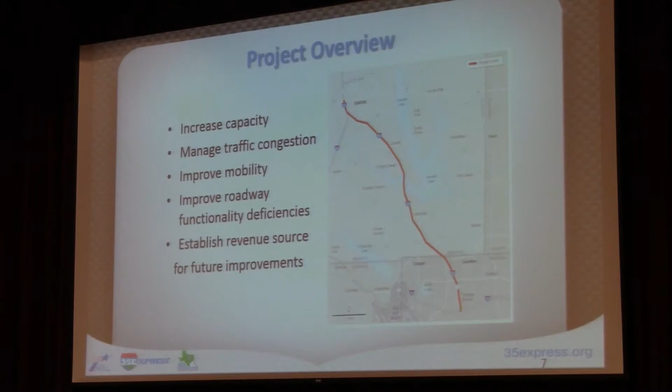What a design-build project does is it cuts the time in half that a normal project would take to build. A project like this may take 8 years, may take 10 years, but we're going to get it done in about 3.5 to 4 years. So it allows our teams to be flexible and to be fluid and to move things along a little bit quicker. As many of you know, we need lots more capacity. I think I heard a stat that said we get 1,000 new folks into Texas every day. A lot of those people are coming to the North Texas region, so we know that we need more capacity, especially in this area. So this project will increase capacity, manage congestion, and improve mobility in the area.

We run through 8 different cities, 2 counties. We work with 4 different transportation agencies, 2 federal government agencies, all working together to make sure that this project runs smoothly, to make sure communication runs smoothly, and to make sure that we're coordinating. There's lots of construction going on in the area, so we have to make sure that we're talking to one another to make sure that we are not impacting every east-west or north-south connection.

To give you a little bit of an overview of this project, we run about 30 miles, and that's going to be between 380 and Denton, all the way down to 635 in Dallas. We'll be building new general purpose lanes, frontage road lanes, and a managed lane system. If we were to do everything that needed to be done to I-35 today, it would cost us $4.8 billion. We only have $1.4 billion identified, so we are doing the project in phases. Everything that I talk to you tonight will be about phase 1 of the project. That is what AGL Constructors is contracted to do by the Texas Department of Transportation. We began construction in late October of last year, and we expect to finish up by mid-2017.

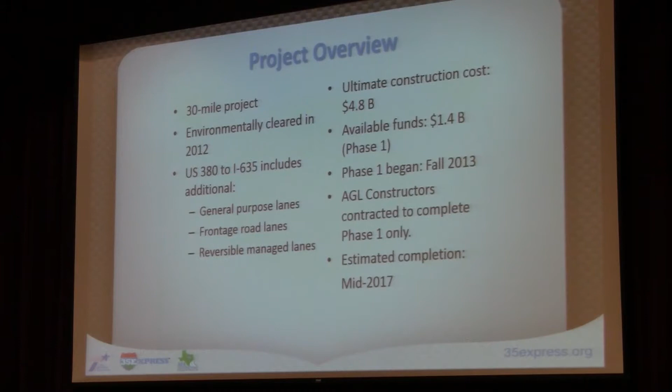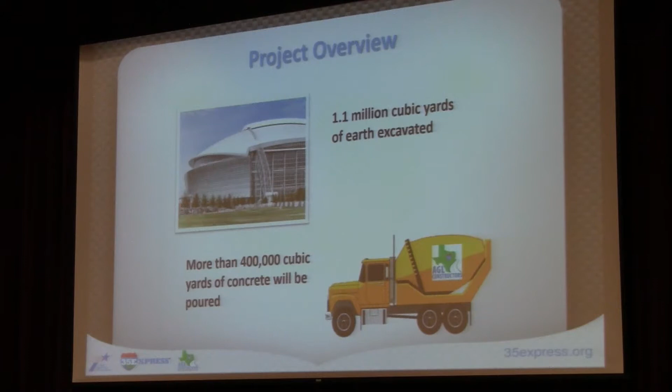To give you some numbers, we expect to create about 900 different jobs at the peak of this project. We will be excavating 1.1 million cubic yards of earth. That's about half the size of the AT&T Stadium, pouring about 400,000 cubic yards of concrete, using about 79.4 million pounds of steel. That's about the same as 8,000 elephants. The elephant weighs about 9,000 pounds on the low end. And then we'll be placing over 650 bridge columns and 2,570 beams.

A new unique part of this project is the managed lane system. TxDOT recently opened the TEXpress lanes on the LBJ project, and so we will have a similar system on the 35Express project. Managed lanes are a congestion management tool with variable pricing. Our lanes will be reversible. They will go southbound in the morning and northbound in the afternoon. The lanes will be separated by barriers and have 11 access points on the north and the southbound sides. You can be a single occupant vehicle or a high occupancy vehicle to use these lanes. You can have one person, or you can have 2 people, or you can have 10 people.

This particular part of the project is called the middle segment. We have divided this project up into 3 segments to handle the public outreach a little bit better. This particular section runs from FM 2181 Turbeville Road all the way to President George Bush Turnpike. So we cover the cities of Lewisville, Highland Village, Lake Dallas, Hickory Creek, excuse me.

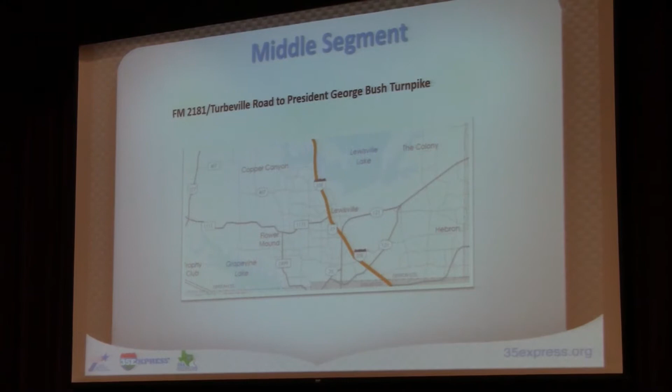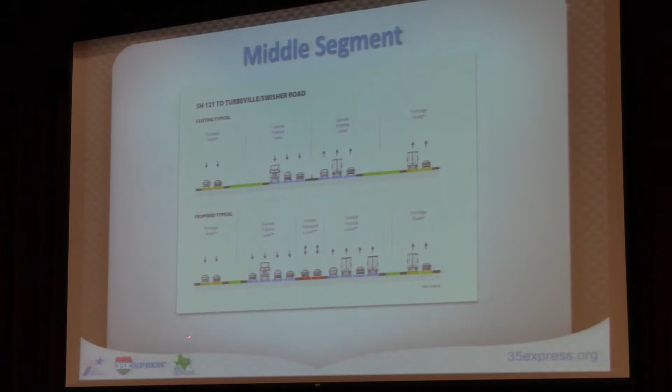So part of what we're going to be doing with the middle segment, as you can see, between 121, the Sam Rayburn Tollway, is adding an additional lane of traffic. So you'll have 4 lanes of traffic between 121 all the way down to Turbeville Swisher, and then you'll have the managed lanes there in the middle.

Again, we talked about the additional general purpose lanes, ramp improvements, drainage improvements, and bridge improvements. We'll be touching about 75 different bridges along the corridor through this project. They will either be reconstructed, rehabilitated, or expanded. And I know you're probably saying, I don't see 75 bridges when I travel. A lot of times you'll see 2 structures, one's a northbound, one's a southbound, or one's an eastbound, and one's a westbound. We count those bridges each, and not as a set, but separately.

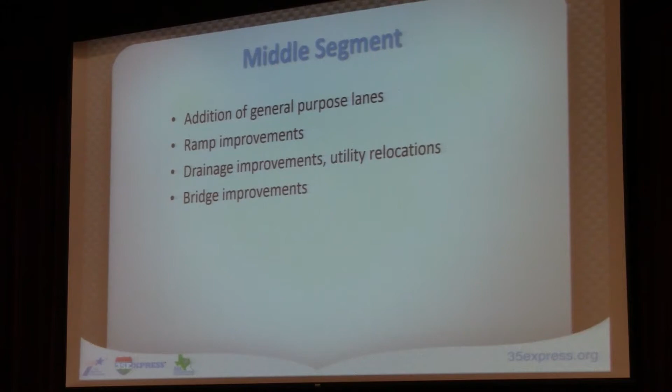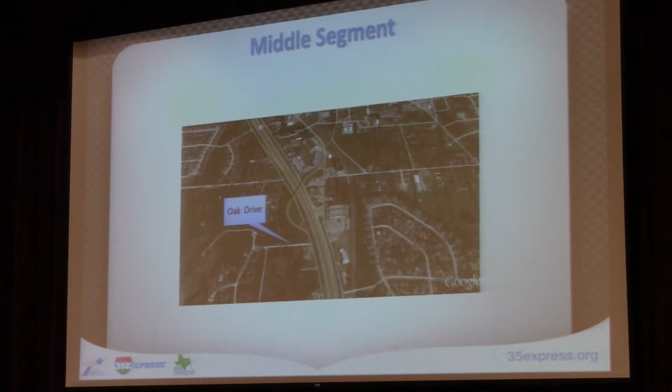One of the bridges that we will be impacting is the Denton Drive Bridge, and this is the bridge near the barbecue place with the pig in front, right on the edge of the lake. We will be taking that particular bridge down and expanding Oak Drive, which is a little street that's near that area, and we'll be taking that across under I-35. So I-35 will become a bridge in that area. This will eliminate a lot of the deficiencies, and if any of you drive on that Denton Drive Bridge, you know it has some deficiencies there and some little quirks. So by doing this, we'll fix that roadway.

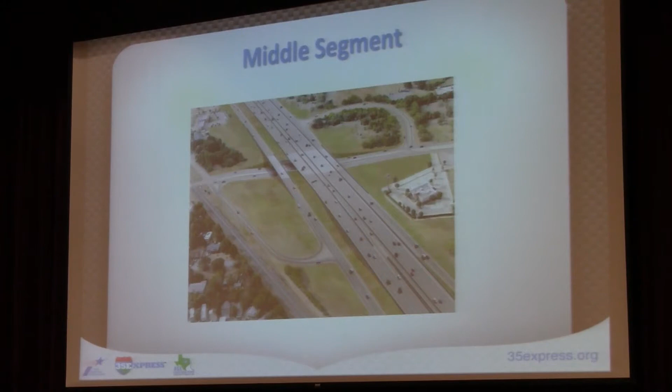Also, another feature in the middle segment is the extension of Tuberville-Hanley Road. This will become a 2-way, and you'll be able to connect directly into 35 here. And then here is another version of that same intersection.

Another feature of this project is a new southbound Lake Lewisville bridge. Currently, what you're driving on now, the north and the southbound bridge, when we get finished with construction, that'll be all of the northbound traffic only. And the bridge that we are building will hold all of the southbound traffic. So when we get finished, the Lewisville Lake Bridge will be 14 lanes across.

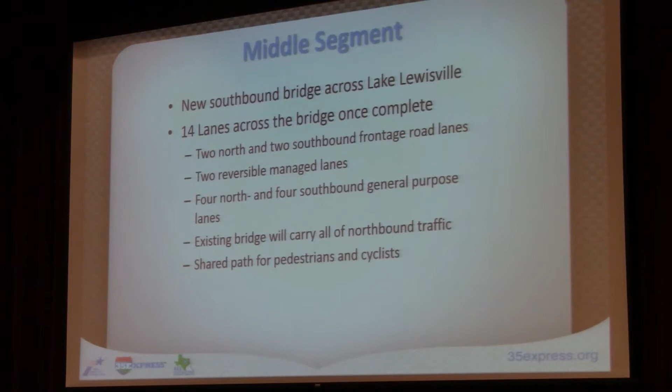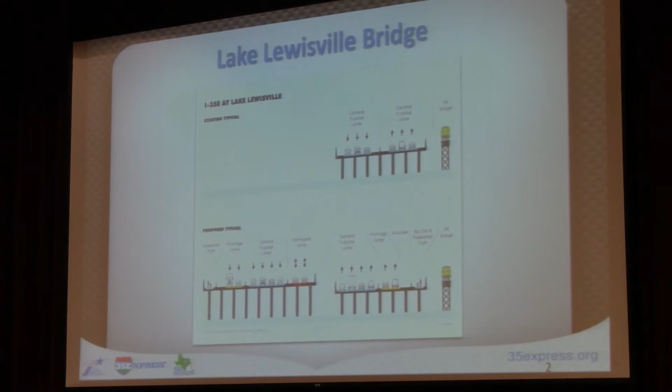And so you can see here, this is where we are today, and this is where we will be in mid-2017. That includes 2 frontage roads. We don't have frontage roads right now, so 2 frontage roads on each side, pedestrian walkway, 4 lanes of traffic in each direction, plus the managed lane system in the middle there.

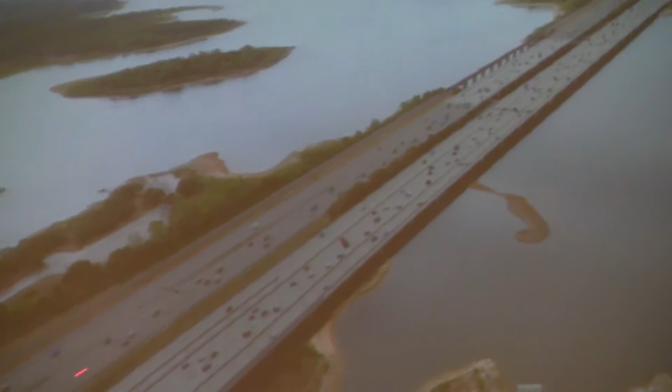And then here's an image of what the Lewisville Lake Bridge will look like once complete. And you can see here this barrier protected area here is the managed lane system. And then here's another image of the Lewisville Lake Bridge.

We'll be making improvements to Copperas Branch Park. As many of you know, we closed that park down in September, and once we get through with construction, we'll open it back up. You'll have new trails on the east side of the park, new roads, parking lots, and a walk bridge on the west side.

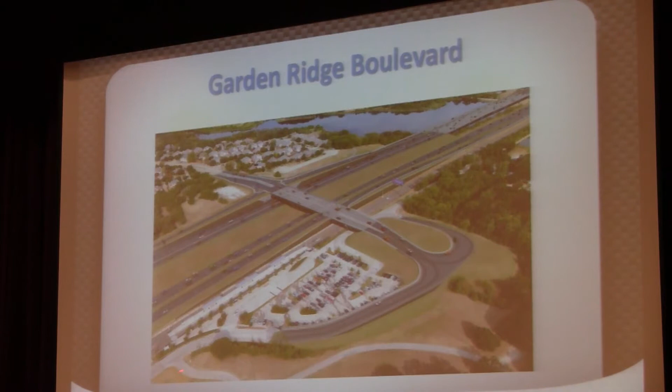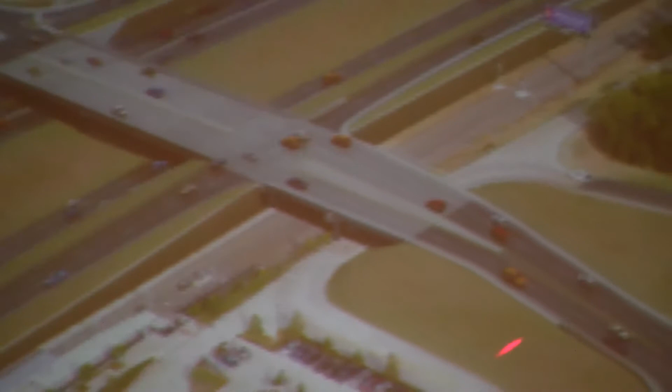We're also going to have new bridges at Garden Ridge Boulevard and Fox Avenue. Garden Ridge work is expected to start this summer, and then Fox Avenue is scheduled to begin early 2015, about the first quarter. Here's what Garden Ridge will look like once we have completed that work. And if you'll notice right over here, you'll see the trail system. The bridge has a walkway on each side. One of the walkways ties directly into the DCTA station here.

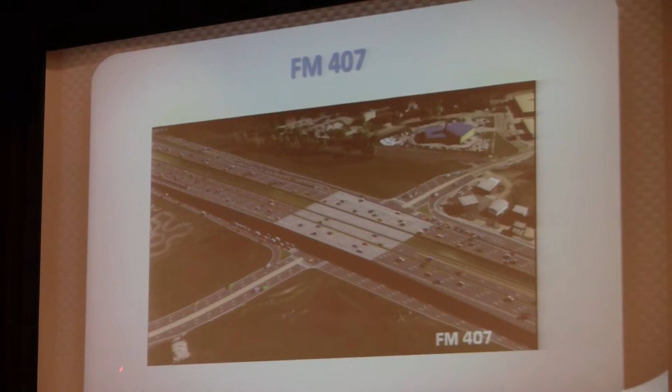Another new feature is the new FM 407 bridge. The FM 407 bridge will go underneath I-35. And this is what that intersection will look like here. This is 407, and this is 35. And work on the FM 407 bridge should start at the end of this year, early 2015.

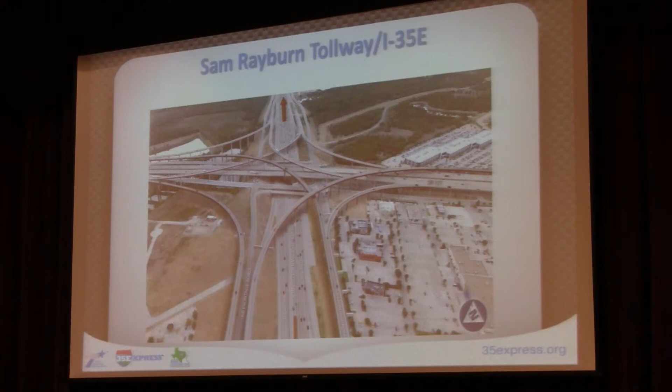Another feature is access on the north side of the Sam Rayburn Tollway. Right now you've got access on the south side, but not on the north side. So if you'll see here, we've got ramps that go from 121 to 35 and from 35 to 121 there.

Just to let you know, we've been working really hard. This FM 407 is one of the first areas that we started construction in. Some of the first things that we do is drainage work. So we started drainage work back in October of 2013 around FM 407.

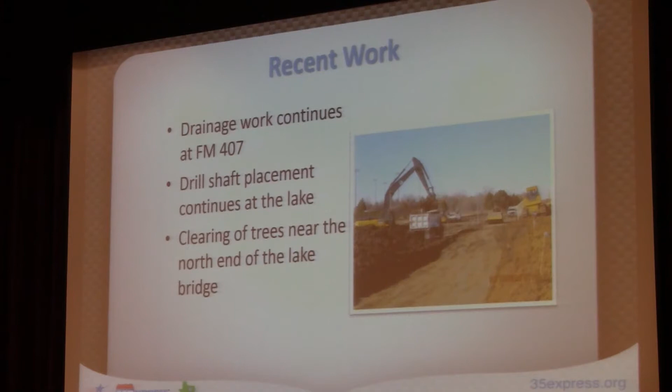We started placing the drill shafts, so those big wire things that you see sticking up out of the ground near the lake, those are what we call drill shafts. They're kind of the first step in building the bridge supports. And then, of course, we've been clearing a lot of the land near the lake to make way for the new bridge. And I'll show you some pictures of bridge construction.

This is what we call a casing. This goes down into the hole first, and then we put the rebar cage in there. Those are the metal things that you see sticking out. And you can see how large that is. It's an average sized man, and he's welding what they call eyes into that, and that helps to lift that casing in and out.

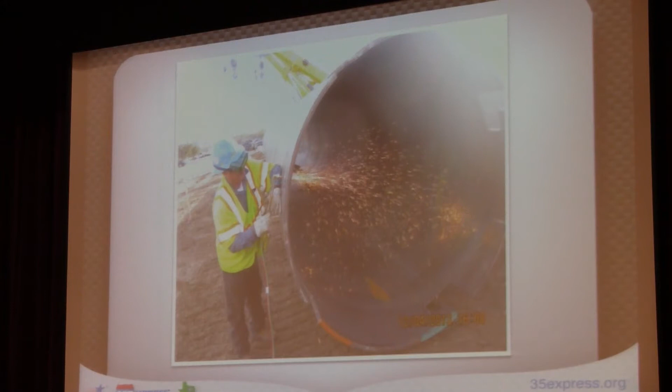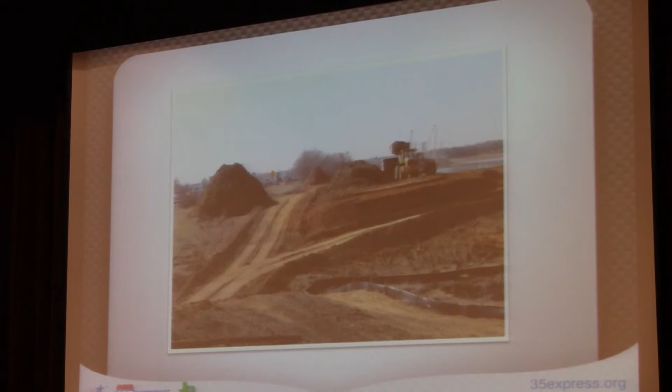More clearing of area near the lake. And then this is clearing of land and excavation on the north end of the lake. And then here's some work that we've been doing around FM 407. One of the things that will be coming up within the next month or so is the paving of the new southbound frontage road.

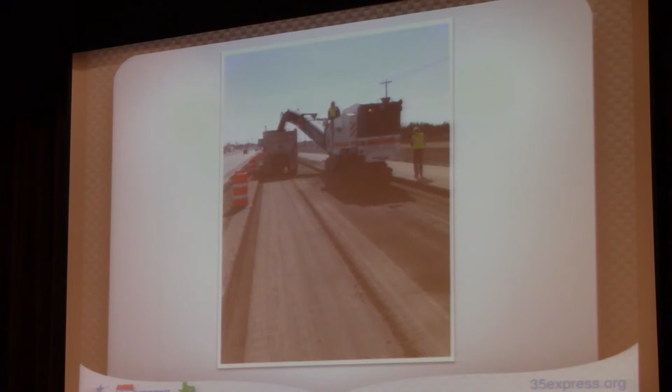Upcoming work, we will be shifting traffic on the Lewisville Lake Bridge next month, which means traffic will be moving over to the west so that we can begin some of the water work that we need to do and stage equipment. We'll be constructing retaining walls near FM 407, and then placing embankment for the southbound main lanes and the managed lane system between Corporate Drive and Hebron Parkway. Garden Ridge Bridge work, as I mentioned earlier, begins this summer.

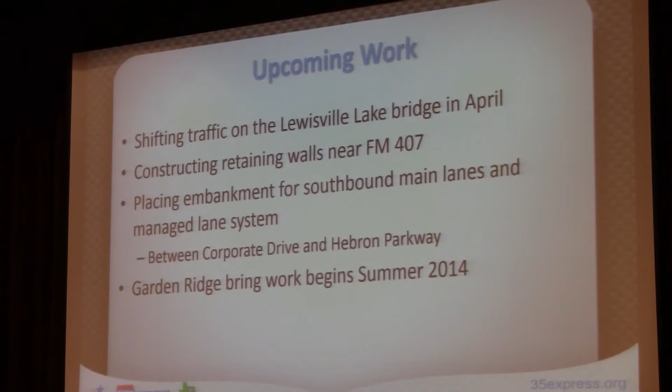And then finally, just wanted to make sure that you all are staying in touch, that you are on our list. We do have a website, 35express.org. We do have an e-newsletter that comes out every other week. We have text alerts. We're very active on Facebook and Twitter. And for those of you who are not on social media, we do have traditional methods. We have a hotline that's answered from 8 to 5, Monday through Friday.

We also have community meetings. This is the second one we've had. We'll have these probably every 6 months to keep you updated on construction, to tell you what's been going on. We have one for each segment. Last night we had the north up in Denton. Tonight we have the middle. And then on Thursday we'll have the south, which is at Farmers Branch City Hall.

We do have an office that you can come in and visit. A lot of the schematics that you were looking at outside, a lot of you had questions about right-of-way. We have all those big maps and schematics in our office. They're also available on our website, but feel free to come by the office. Again, we're there from 8 to 5, Monday through Friday, and on Saturdays by appointment.

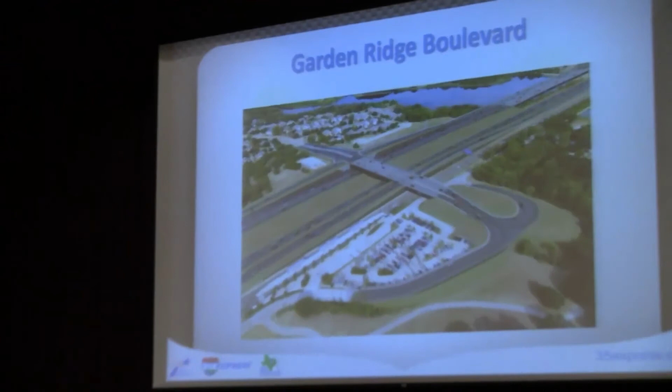Please ask the question one more time. Okay, based upon previous background, what percentage of people will use the managed lanes? Probably 2,000 to 3,000 a day. So is that like 10 or 20 or 30%? It depends on the time of day, but yeah, it's probably about 20% of the traffic. Thank you, sir. Appreciate it.

And I was going to ask you a question about the tolling. I'm with the Department of Transportation in the Dallas District. The toll policy for the Regional Transportation Council is to have a peak hour toll. What we end up doing is flexible tolling rates. The rate will start out at 14.5 cents a mile. As you go through there, you're guaranteed in the managed lanes a 50-mile-an-hour speed. If it drops below there, you will get a discount. You get refunded if it gets below 50 miles an hour.

The toll rate will go up as congestion goes up. So the intent is, if you're in there, you'll pay more in a highly congested time of day, because there's time of day pricing, so as it gets more congested, it'll get more expensive, but you are really looking at the speed. If the speed drops below that speed, you will not have to pay the toll at that point. And that's the reason it goes up to 75 cents a mile. It starts at 14.5 cents.